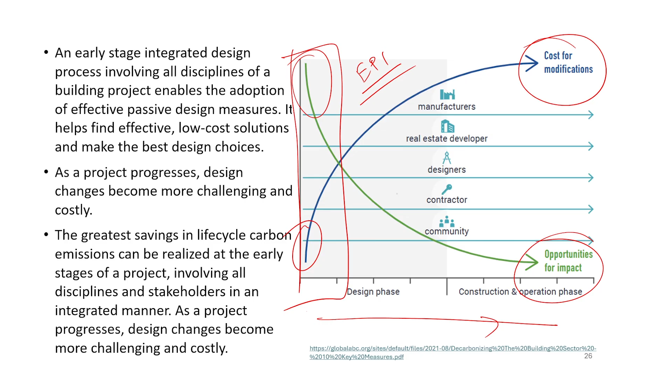So, one of the major emphases needs to be put on this, and as you can see where this is coming from. So, if you can make better building design, what will you reduce? What you will reduce is EPI. If you can work with better building design, you can work on reducing your EPI from day one. And if you can start working on EPI from day one, you can head towards net zero, as one of the strategies. So, there could be a lot of interventions which could be done.

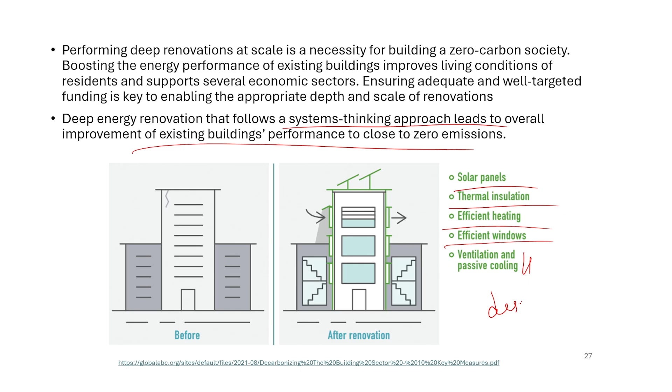It could be integration of solar panels, thermal insulation, efficient heating system, efficient window system, ventilation, passive cooling. It's a subject in itself in terms of what all could be done on building design interventions, and how the buildings can be made much more energy efficient, but it will basically require a system level thinking approach to overall improvement in building energy performance if we want to achieve net zero. So, building design, and that too early design, would be the prime thing if you really want to work towards net zero buildings, right.

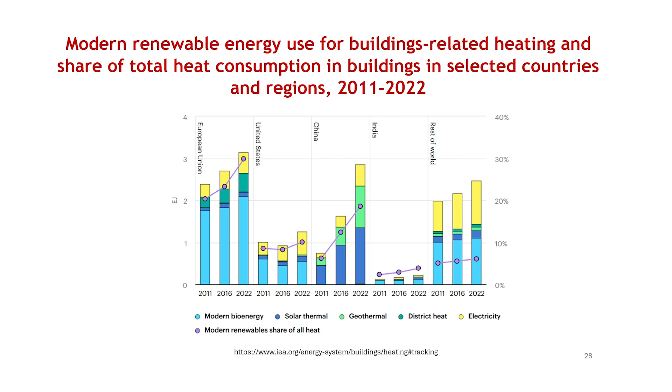And so, what is being worked on a lot these days is, can you start making this transition from using direct fossil fuel, moving it from scope 1 to maybe scope 2, which is indirect emission, in building heating. Why that is important is because if you continue to depend upon building by building energy consumption as your prime source of heating, any interventions needed would be needed in each building, each office, each residence, and that will be a very staggered job.

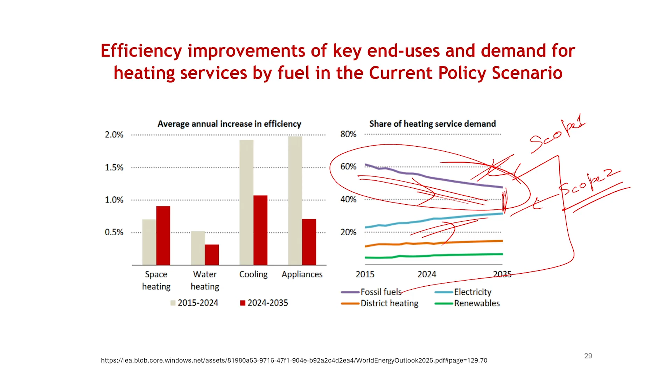And any intervention which needs to be rolled out with that thought process will be very difficult to implement. But if you can start moving to electricity as a general source of heating for these buildings, you can really work it offline, making your electricity much less carbon intensive, much more carbon efficient, and that will have its direct impact on these buildings. While on the other hand, if you come with a more energy efficient heating system using a specific heater which is fossil fuel based, that intervention would have to be done at each building level separately, which will be a much more tedious job.

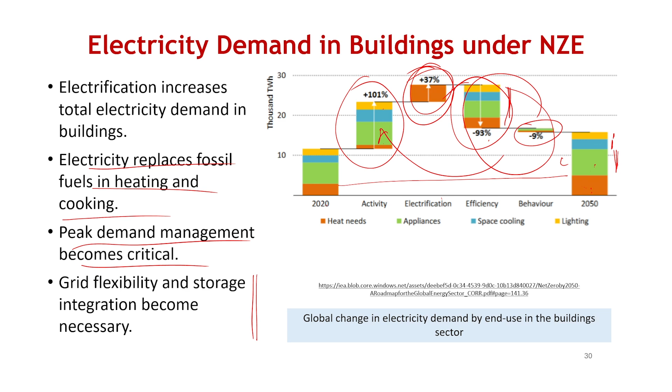So, it is expected electricity will replace fossil fuel in heating and cooking, but since the cooling demand is expected to grow a lot along with that, peak demand management will become critical, and grid flexibility and storage integration will become a key parameter in this whole transition.

Then start looking at it from an economic breakup perspective, what is expected in the advanced economies versus what is expected in the emerging markets and those kinds of geographies. Everywhere you can see that electricity will become the prime source of energy. And if you see, some of you can start relating what was happening in the steel sector, what was happening in the aluminum sector, what was happening in the transport sector.

Similarly, what you can see even in the building sector is that we are moving away from a direct use of fossil fuel to electricity. That is a clear-cut transition that you can see happening across sectors. That is something what you are seeing.

Even for the advanced economies, while the energy consumption is expected to remain flattish, what you are very clearly seeing is that the use of direct oil is reducing, use of direct natural gas is remaining flattish or is reducing, but it is electricity which is slowly becoming the prime source of energy for these advanced economies also. Similarly, for emerging market and developing economies also, electricity is becoming the prime source of energy as you go along.

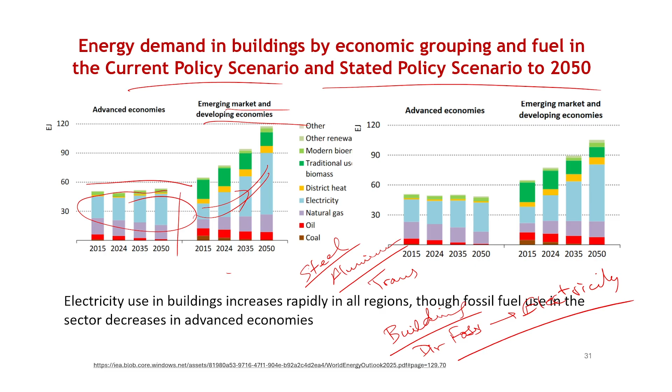So, this is a very clear-cut change which we are seeing happening both with respect to the current policy scenario as well as the stated policy scenario for 2050. This is for the current policy scenario and this is for the stated policy scenario. In both the cases, what we are seeing is electricity is becoming the prime source of energy, and this kind of changeover we are seeing continuously.

And while this transition to electricity is happening, what is also expected to happen at the same time is the use of renewable energy in the final building energy consumption, with more and more renewable energy generation sources expected to come up. From currently 64% non-renewable energy sources, we will probably move to 23% non-renewable energy sources, and overall 77% of net energy will come from renewables.

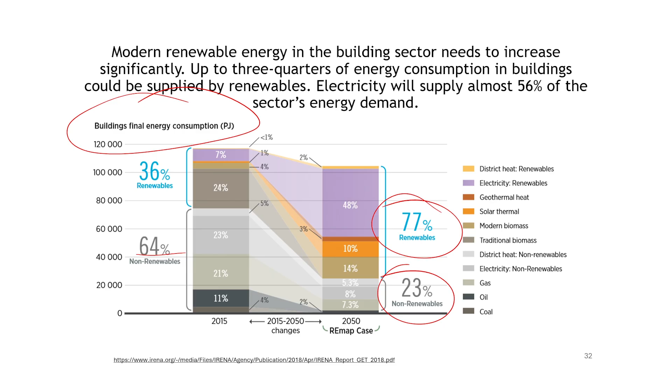And as you can see, net building energy consumption is expected to actually go down slightly with building energy efficiency and all those parameters coming into play. So, this is a very clear-cut transition that is expected to happen. So, if we put this net zero emission scenario all together, electricity will supply approximately 56% of building energy by 2050.

Fossil fuel use is expected to decline sharply. Modern renewables will be about 75% of the building energy demand, and heat pumps become the dominant heating technology because they are much more energy efficient compared to the current technology. And what is also expected is that deep retrofits will scale significantly, because more and more work will happen on building envelopes, and on how we can make the EPI of these buildings lower and lower.

And with this transition, it is expected that we can see the phasing out of oil completely from these uses. Even some of the indicators are showing that probably we can do away with natural gas as one of the heating elements in the building scenario, and it is primarily electricity and direct renewables which will be the prime source of energy for building energy consumption, which is kind of an ideal scenario, worked out in the form of the net zero energy transition.

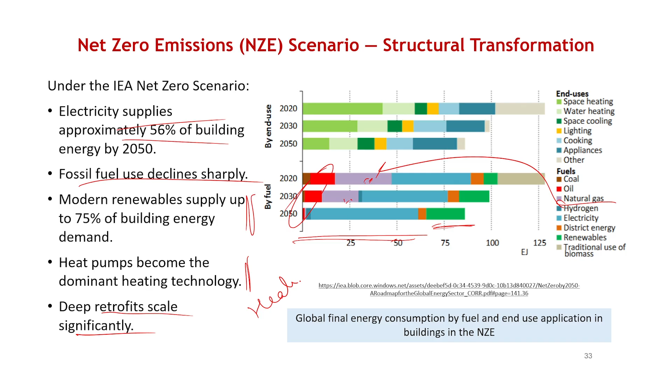Let's see how we transit, but that's how probably the building energy can be handled, which, just to recall, is primarily dependent upon heating, and cooling is also going up drastically. Emission reduction: how are emission reductions expected to take place from the current emissions? As you can imagine, activities are going to increase drastically, but since they will be much more energy efficient activities, it is expected to grow.

Whatever measures we are cutting in will reduce it drastically again, but we are seeing that from 2030 to 2050 a lot of work will still be built up again. So that will have another spurt of activities increasing, and from there, to reduce it to almost net zero emissions, what is going to be worked upon is energy efficiency and electrification, with this electrification primarily coming from renewable energy. Other renewables coming into the picture, some bioenergy coming into the picture, and fossil fuel will be dealt away with in this whole transition.

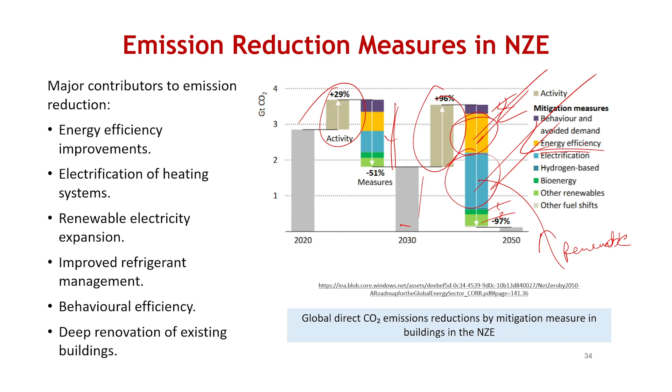So this is the transition which buildings have to work upon, and as you can see, the major emphasis is being put on the energy efficiency side and electrification. So these are the two major verticals, if you are trying to sum up this building energy transition. How much is the investment and financial side that we are talking about?

In building energy transition, many energy efficiency measures have negative abatement cost. That's a very good thing to have, like lighting, improved insulation, efficient motors, smart controls. Overall electrification may have a very moderate positive cost, but if you start putting all these things together, all these measures are showing very good MAC behavior.

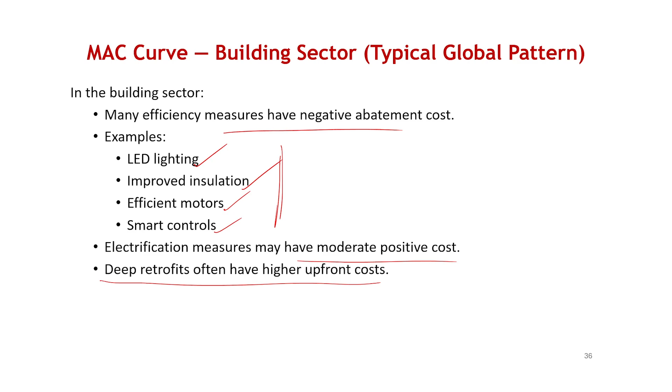So while deep retrofits have higher upfront cost, if you look at it from a long term perspective, and since buildings are not made from a short term perspective, the path to net zero buildings could actually be a cost effective solution for most of the world. So it is not a lost battle for the building energy sector. The issue is different. Energy efficiency actually reduces the operating expenditure, and the savings accumulate over long building lifetimes.

However, the barrier which exists is who is the landlord and who is the tenant, or who is the builder and who is the resident. The problem here is that it is the builder who is making the building, or the landlord who owns the property, while the resident or tenant is the one who is using it. And if any energy efficiency measures are cut in, they will be taking in the cost. So cost will go here and savings will go here.

And this paradox, this dynamic of money flow, is very typical of this specific sector. And it is because of this that while MAC curves are looking negative in most building energy efficiency projects, this is not happening so quickly, because it is a different party incurring the cost and a different party getting the benefit of the savings.

So until we work on a cost sharing model, profit sharing model or incentive model, this problem is not going to be solved in the short run, unless the person who is making the building starts living in it, but that is not going to change. The market dynamics are not going to change so quickly. Since different people are making it and different people are living in it, the cost sharing model is not so straightforward.

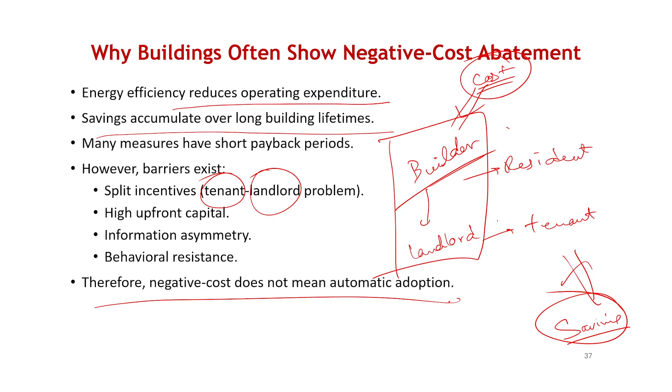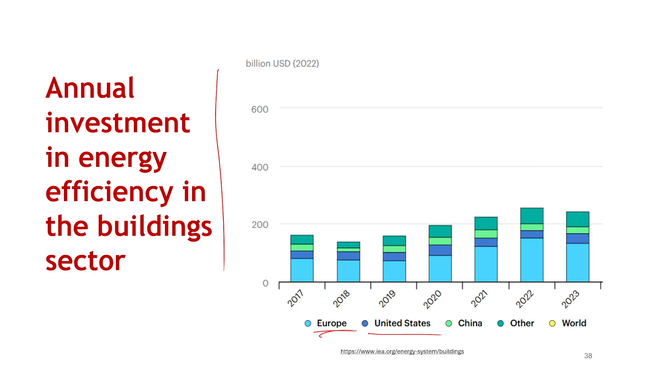Having said that, the investment needed in building energy efficiency is of course not insignificant, because a lot of work is still to be done, and on the energy efficiency side you have to work mostly in Europe or the United States, wherever the world has already been built up. Where the world is getting built up, energy efficiency could be done very differently. But most of the money right now would go into the part of the world which has already been built up.

So from an overall perspective, energy efficiency investment must increase substantially. Retrofit scaling and financing must scale rapidly. The problem is how the cost will be shared and how the benefits will be shared; that is not very effective right now, and there are capital cost barriers which are major obstacles.

If you can come up with a more variable cost based model, that potentially can change this dynamic. Public private partnerships are necessary, and green bonds and maybe concessional financial mechanisms have to come in, because the person who is expected to bear the upfront cost needs to benefit from energy savings in these buildings later on. If that doesn't happen, we don't see this transition happening very quickly.

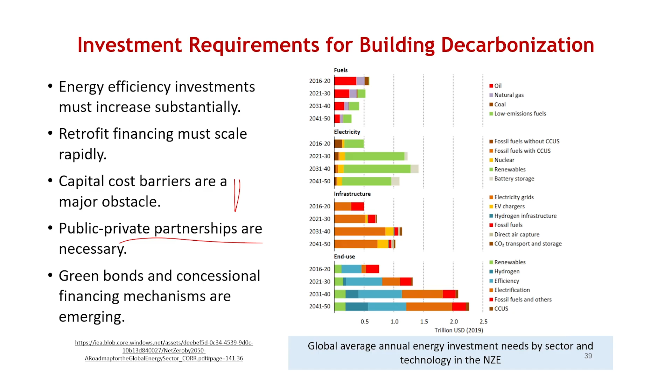I think I've already talked about what is expected to change in all these sectors. So I'll not go into that detail again, but you can understand where the money needs to go and what the bottleneck around it is.

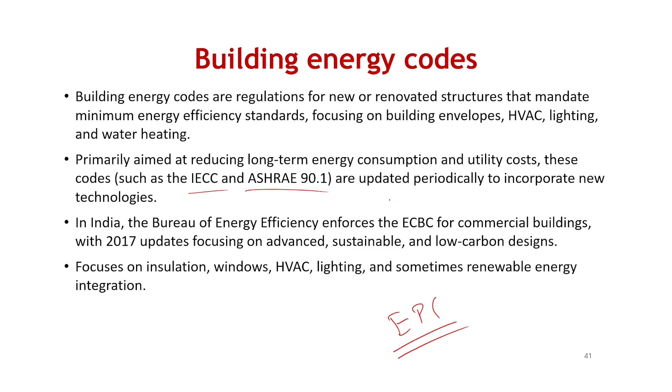What is happening on the governance side, or the building energy code side? Building energy codes are regulations made by the governing bodies which maintain how the building should perform, not in terms of aesthetics, but in terms of its performance, what the EPI of the building should be, and what kind of energy efficiency the building should aim for. There are bodies and codes around it, like IECC codes and ASHRAE codes. In India, ECBC is coming with their own codes.

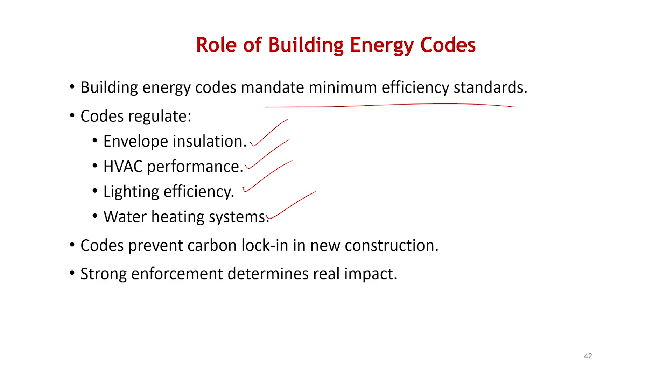The role of these building codes is usually to mandate minimum energy efficiency standards. These codes can regulate envelope insulation, HVAC performance, lighting efficiency, and water heating systems. They can have various kinds of mandates pushed into the system. But the problem is, is the market ready to accept this as an incentive or as a burden? That's how the market will react to some of these codes coming through.

And it is not that the whole world has these codes rolled out. Some countries have very unified building energy codes. Some countries, like India or other parts of the world, have some standards which have been put in. More developed economies have very unified building energy codes. But as you can see, a lot of places in the world have no building energy codes at all. Even a big country like Russia has no building energy codes right now, or not a very significant one.

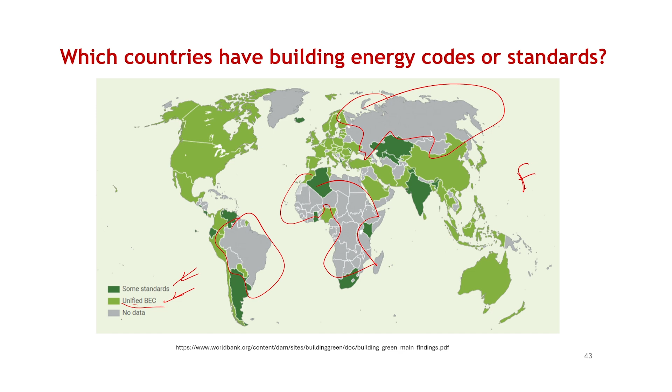So a lot needs to be done in this sector specifically, and if we need to start making energy efficient buildings, these codes need to be much more uniform, and we need to come up with some definitions around it. As far as India goes, we have building energy codes which mandate minimum energy efficiency standards and regulate these performance indicators, as I already mentioned. In advanced economies and emerging markets, we expect to see more and more economies become compliant with these codes.

What we expect to see, and what we are already seeing, is that annual energy savings are coming in because of these codes. Another advantage of codes is that they prevent carbon lock-in in new construction, but it is strong enforcement which will determine the real impact.

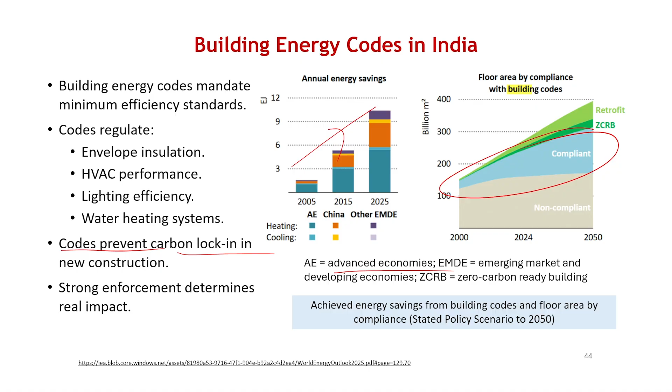And the problem that we see, at least around us, is the enforcement. The problem that we see around us is still a kind of marriage of convenience, where we don't enforce them because of some other ulterior motives. With respect to existing stock and retrofitting, as we already talked about it, I will not go into more detail.

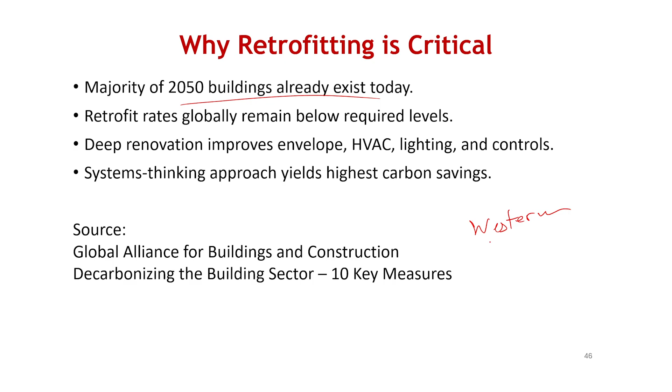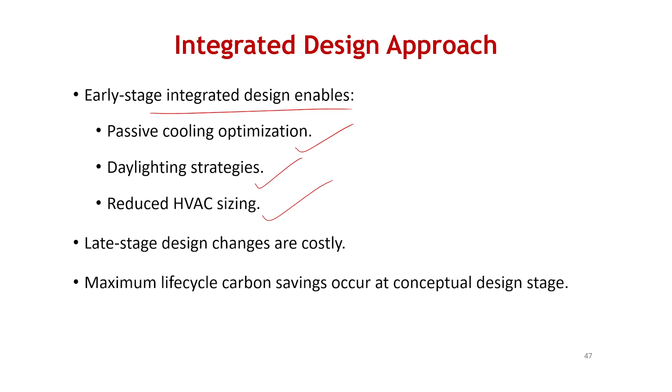The majority of 2050 buildings already exist today. Retrofit has to be done, and the Western world would have more retrofitting which will need to be done, and there are major hurdles around it. What we need is an integrated design approach, because early stage design would enable passive cooling, daylighting strategies, and reduced HVAC. If you don't do that, you will have to go into retrofit mode, and that's the concern.

In terms of embodied carbon, I have not talked a lot about this, but as I mentioned earlier, this is becoming an emerging priority. As we work on more energy efficient buildings and more carbon efficient supply systems for these buildings, the carbon put into these buildings during the construction phase itself will become more and more prominent. That will start determining the prime carbon footprint of these buildings.

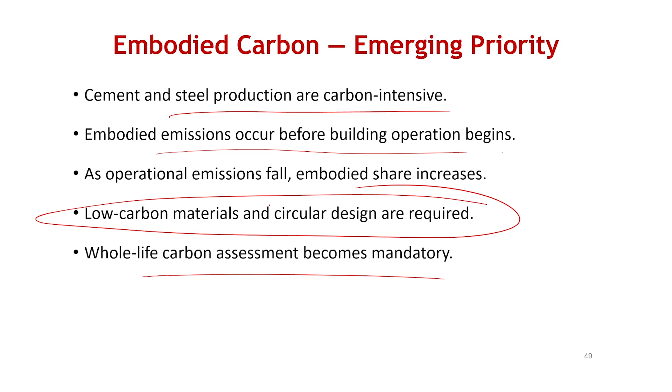Cement and steel production are very carbon intensive, and a lot of embodied carbon occurs before building operation even begins. So whole life carbon assessment will become important, and low carbon materials and circular designs would be needed for this sector. This is an emerging area of research, because as buildings become more energy efficient, this is becoming the focus area.

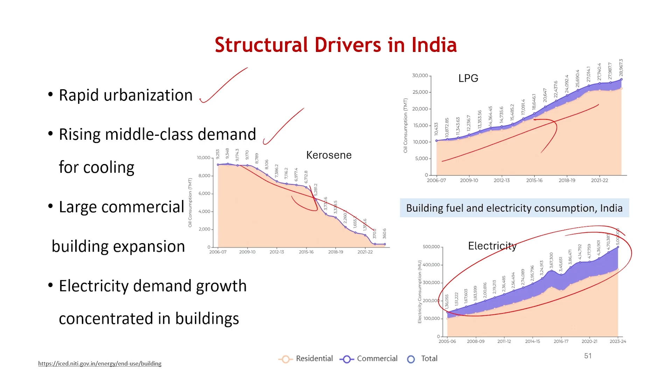From an India perspective, over the last few years India has seen rapid urbanization, rising middle class demand for cooling, large commercial spaces coming up, and electricity demand going up. Kerosene demand in buildings has gone down drastically, while LPG demand and electricity demand are increasing drastically. So India will work very differently from the world, and what would become more and more worrisome for India is its cooling demand.

So cooling would be a defining risk for India. The majority of the floor space which will come in India is in hot climates, and with global temperatures rising continuously, air conditioning penetration, increasing population, increasing heat, and increasing GDP with more money in people's pockets, this will all multiply into more cooling demand, which would pose huge challenges for grid stability, because it will have its own peak issues.

That is why more stringent efficiency norms have to be built into this sector. If this sector has to avoid low efficiency buildings being locked in for a long period of time, efficiency standards must be tightened. That is a big concern for India, because if we do not bring very tight energy efficiency codes into the picture, we may be locking into infrastructure which would consume a lot of electricity going forward.

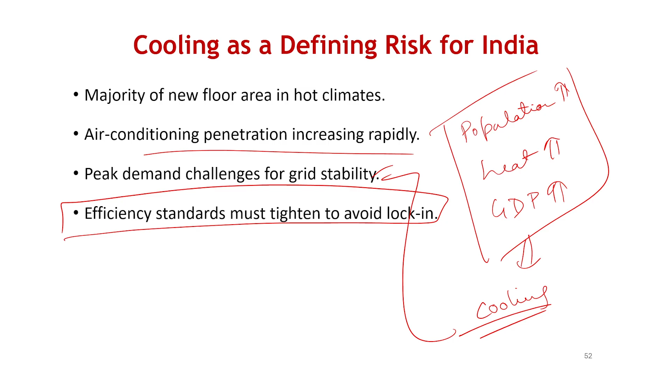So India has to look at it from a long term perspective, with energy demand already expected to grow by leaps and bounds, a lot of urbanization, and a lot of people coming from a long stint of darkness into brighter villages. Along with this, if we do not avoid this cooling load being locked in right now, we could face very high power consumption, which will lead to very high emissions and in turn impact our net zero carbon journey.

And so cooling can be a very defining risk for India if India does not work on this. What is needed is a kind of system level thinking. If you start putting all the various buckets together, the pathway for decarbonizing the building sector would require ultra low EPI, electrification, renewable energy integration, grid decarbonization, embodied carbon reduction, smart control and demand, and not a single lever is sufficient.

So it is basically a mixture of multiple aspects which have to work together, and just to repeat, this is the end user demand. Anything which has to be handled at the end user end has to be dealt with very differently, since this is mass usage which will determine the transition of this path, and people will behave the way they will behave. People will react the way they will react. People will work the way they will work. If this sector needs to be decarbonized, we are talking about end user level interventions, and this would need a very cohesive strategy and system level thinking.

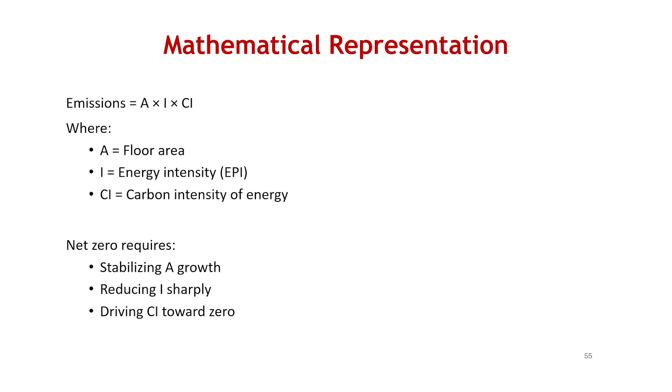From a mathematical perspective, I already talked about it, but to put this in number perspective, the impact of this EPI change would be that if EPI is 180 kilowatt-hour per meter square and grid emission factor is 0.7, your carbon intensity will be 126 kg per square meter. And if EPI reduces from 180 to 80 and your emission factor remains the same, you could save almost 50% on the net emissions.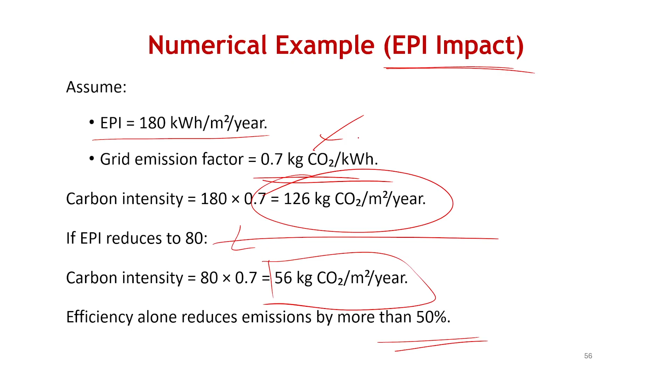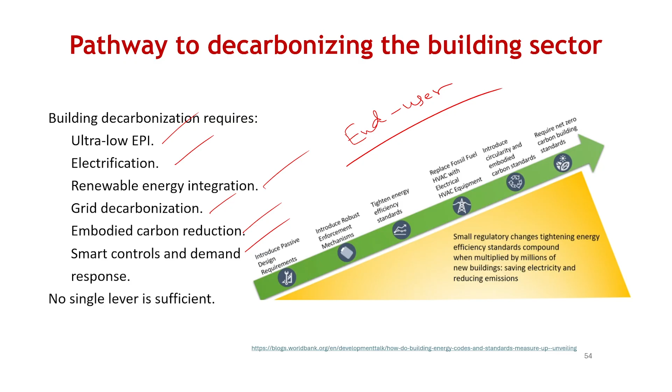So while you do this, if you then start working on grid emission, if you reduce the grid emission to 0.2 from 0.7 and EPI comes to 80, then it could potentially mean that if you work on multiple axes together, you could start really achieving net zero, and the path towards net zero emissions in 2050 can actually start becoming a reality if you work on all these verticals simultaneously.

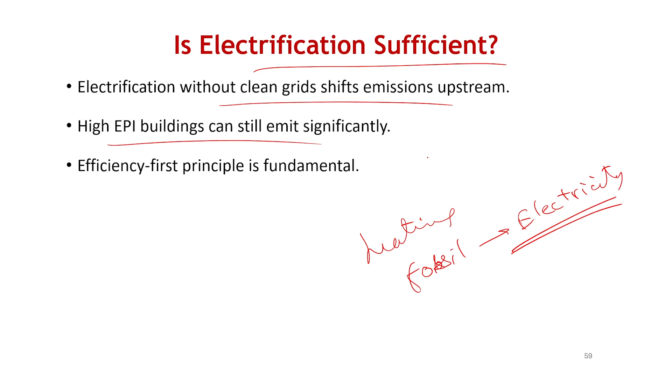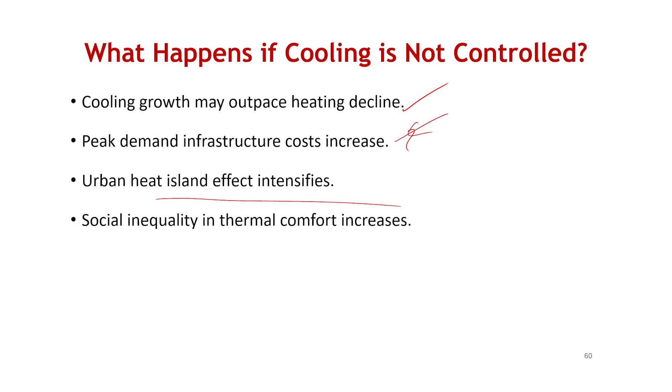And what happens if cooling is not controlled? Cooling growth may outpace heating decline. Peak demand infrastructure costs can rise significantly. The urban heat island effect can intensify, because all of these devices take heat from inside and throw it outside, so that effect can increase drastically. Social inequality in thermal comfort will increase, which can lead to social level issues also. That is a different dynamic altogether, out of the purview of our discussion for now. But as you can imagine, this is not an easy problem, and it needs to be handled in the right way.

So from India's perspective, what would be the priority? It needs to strengthen its ECBC norms. The ECBC norms of India are still very loose. It's on a choice basis rather than an enforcement basis, and India has to move away from that. If India doesn't do it right, it may lock in long term non-energy efficient infrastructure, with all the big build-up coming with the Pradhan Mantri Awas Yojana and everything else. If we are not careful about making those structures energy efficient, we could be locking into infrastructure which could be highly energy demanding in the long term.

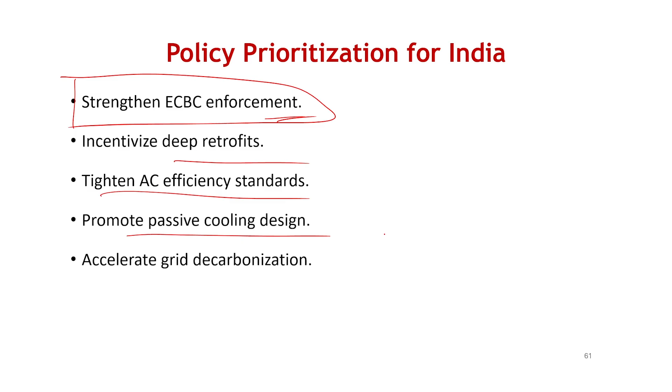So, a lot of work should be done on that line also. We have to tighten AC efficiency standards. We have to promote passive design cooling aspects, and also accelerate grid decarbonization if we have to move towards this path of overall decarbonization that we need to do.

In terms of investment and governance gaps that we see, there is a high upfront cost which is involved in this whole transition. We see this issue of weak enforcement even if ECBC is there, since it is still kind of a by-choice method and it is very loose. So, people get away by showing some way of ECBC compliance rather than actual compliance. There is very little green material labeling which is happening.

There is a myth in the system that green buildings are much more expensive. While that may not be the case, they may have some upfront cost attached. But if India can come up with a very interesting cost sharing model, India could have buildings which are much more energy efficient and can really make the transition much more interesting. There is a skill gap in design and auditing, which is very obvious given our lack of emphasis on this line, and financing access is a constraint given the high upfront cost.

So, overall if you look at a structural transition summary, I think I have already talked about it, but just to recap it again, we need to talk about low EPIs, electrified heating and cooling, renewable based electricity, low carbon material, strong regulatory enforcement, and integrated urban planning is what will lead to it.

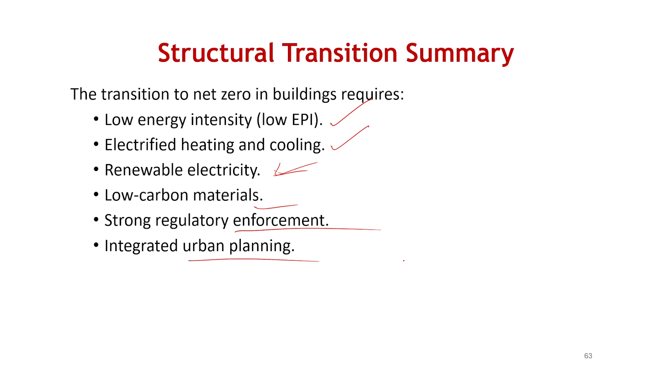In summary, the building sector is a mitigation challenge. It's a mitigation challenge because of its dependence on a lot of other sectors as input sectors. And since it's a sector which is linked to the end user, and primarily the energy is going into the residential sector itself, this sector is not an easy sector to handle from an enforcement and transitional management perspective. Transitional management in this sector will be the key, because this sector would need a lot of end user interfaces to be managed, and how to manage public sentiments and the public transition overall would be the key in this whole sector.

It is basically an infrastructural transition which is needed, and since the money is going into the pocket of somebody else while money is being spent by somebody else, how you solve that paradox is something very interesting. A financial reform might have to come because of this specific paradox, to solve that kind of a riddle.

It is basically going to be a test for governance, because this is a very complex scenario to handle and it is direct public dealing which is happening here. How this transition can be handled in a way which is energy efficient, cost effective, cost sharing, and with modern technology integration is going to be the key challenge for this sector.